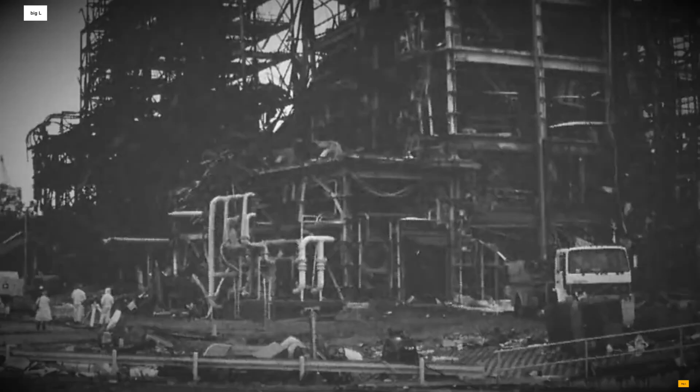A disaster would rack up a death toll of 23 employees, injuring 314, and the company in charge would get a modest $5 million fine, even though safety on the site was inadequately managed. As such, today's subject will get a rating of 7 on my plainly difficult disaster scale, and also a 7 on the historical legacy scale as the event helped improve process safety. Welcome to a brief history of the 1989 Phillips Petroleum Chemical Plant Explosion and Fire in Pasadena, Texas.

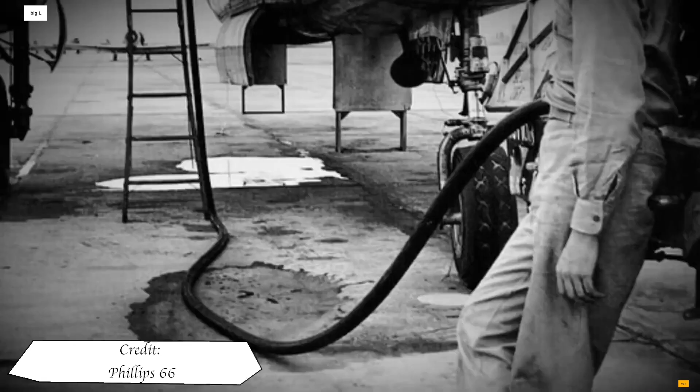Phillips Petroleum was a petrochemical company with its history tracing all the way back to 1917, with the forming of the company by brothers Lee Eldas Phillips and Frank Phillips, based out of Oklahoma. Quickly, the company worked in all parts of the oil industry, including fuel production, crude oil pipelines, refineries, and marketing of petroleum products. Like many companies during this period, the demand for fuel boosted the organisation's coffers. But the growth would really speed up during the big old dumpster fire that was the Second World War.

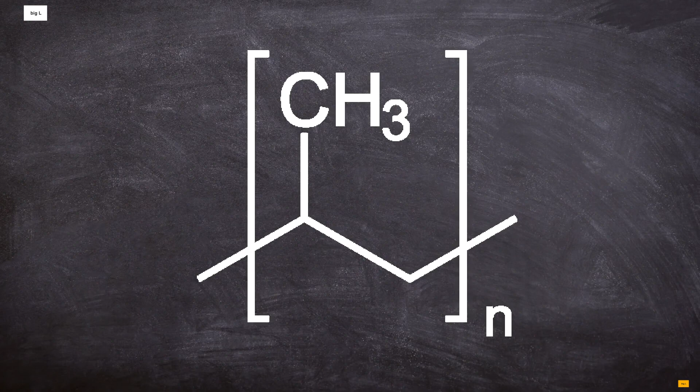By the late 1940s, the ever-growing Phillips Petroleum had become active in the chemicals business, creating Phillips Chemical Company, which set up and began operating a large plant on the Houston Ship Channel. In the 1950s, the plant began producing polypropylene plastic, trademarked as Marlex. This was used in blow-moulded and rotationally moulded components. This will be the facility that we will be focusing on today, and would be the epicenter for a disaster nearly 40 years after it began operation.

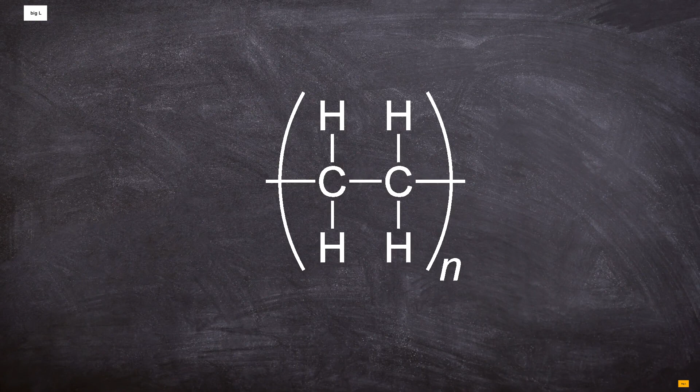By the 1980s, the site was being used to produce polyethylene, which is one of the most common plastics used in bags, food packaging, and pretty much anything you use day to day. Making this material can be a dangerous process as highly flammable gases are given off, which would be the cause for the disaster. But first, let's look at the process used by Phillips Chemical.

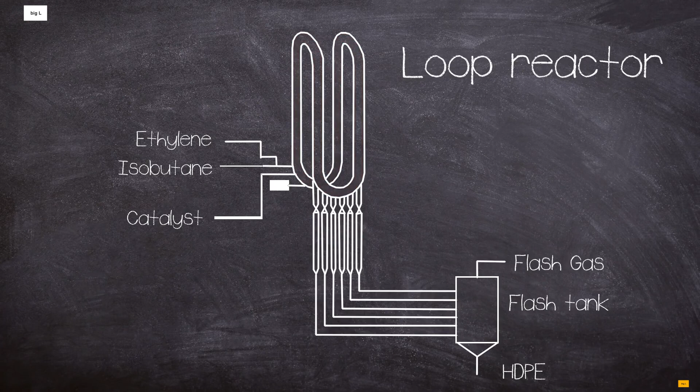High-density polyethylene is manufactured at plants 4 and 5 at the Houston Chemical Complex, at high temperatures and high pressures. The process uses a thing called a loop reactor, which is an arrangement of 30-inch diameter pipes mounted vertically in 150 feet tall continuous circular shaped structures. This heats and pressurizes the chemical mixture to 600 psi and to a temperature range of 82 to 110 degrees centigrade. Reaction is one of condensation polymerization of around 95% ethylene dissolved in isobutane. Hydrogen and hexene were also added to achieve targeted product quality specifications.

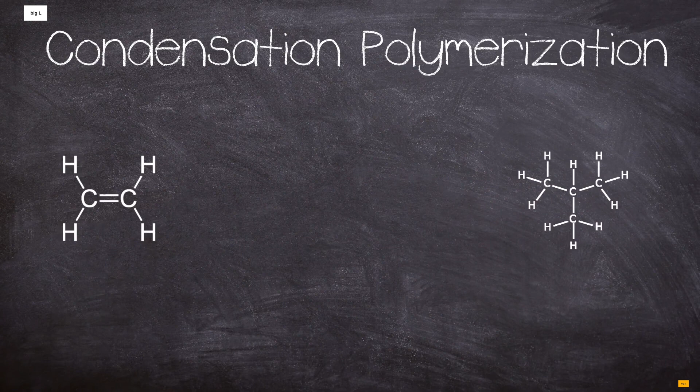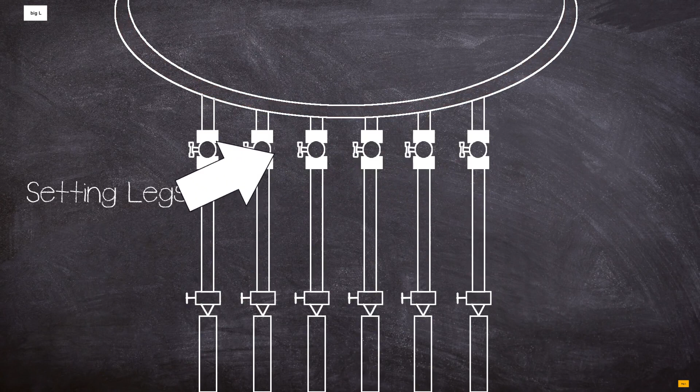As the reaction product gained mass in the loop reactor, it would eventually become heavy enough to drop out of the circulating reaction mixture. At the bottom of the loop reactor were settling legs, 6 in total and 8 feet long, that are used for collecting the polyethylene particles. Each leg had 2 valves, one at the top and one at the bottom. The upper consisted of an air-operated 8-inch ball. These were used to isolate the section from the reactor after production. The bottom valves were take-off ones that were fed into a flash tank.

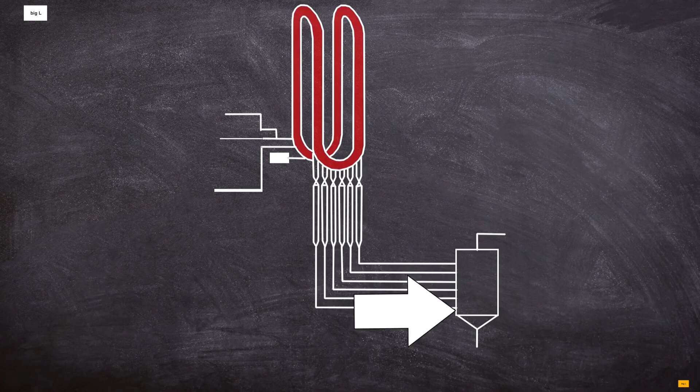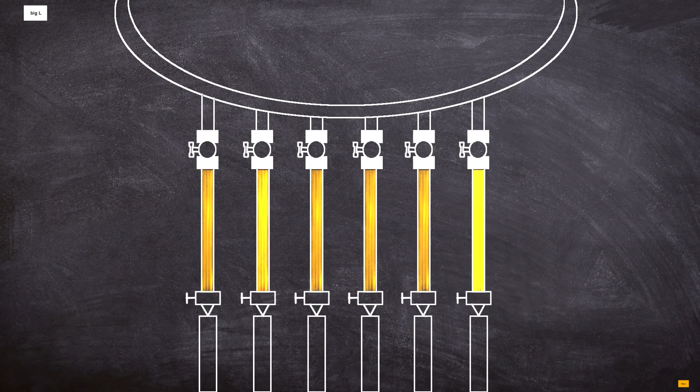Once a leg was full or clogged with product, the 8-inch ball valve would be closed. This was to stop the highly flammable gases inside the reactor from venting to atmosphere. The settling legs were the interface between the high-pressure reactor and low-pressure flash tank process sections. Once the process was complete, the polyethylene fluff was then taken from the tank to be turned into the finished product. But the way the reactor and settling legs were designed to work had a problem, and that was everything had to be shut down once all 6 became full or clogged. This necessitated the need to be able to empty the legs during full power production to reduce downtime.

Phillips Petroleum had a policy for safe equipment isolation, meaning any maintenance would have backup isolation called double blocking. This can be done by a double valve setup. Obviously, this would only work if the area you want to isolate had 2 valves. If this wasn't possible, then a bolted flange setup could be used to have 2 sets of protection.

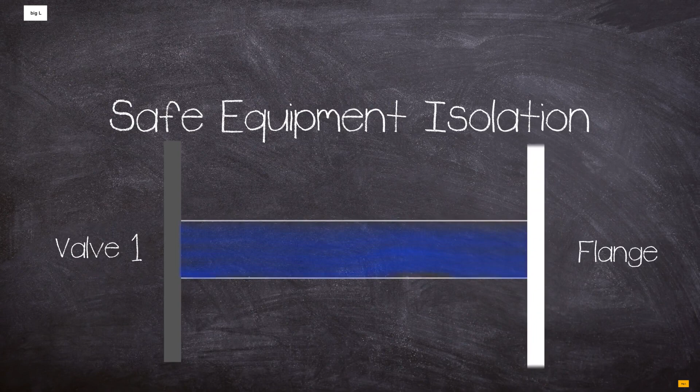This had, in the case of a loop reactor, a problem: installing the blind flange was time consuming, making maintenance whilst the reactor was running pointless. So, as we see very often in these videos, a local solution was devised.

This involved the 8-inch ball valve being closed to isolate the plugged settling leg from the loop reactor. Then the 8-inch ball valve stem was physically locked in its closed position. Finally, the inlet and outlet air hoses actuating the 8-inch ball valves were disconnected from the remote valve switch control panel. This was double locked but definitely not double blocked, as any failure of the ball valve could mean the reactor

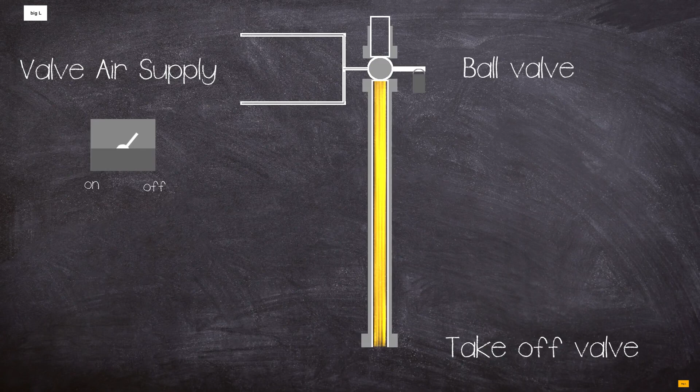was exposed. After this locking was complete, the settling leg could be emptied by removing the take off valve and having a contractor reach their arm up into the leg to pull out the fluff. This leads us to the 22nd of October 1989. 3 of the 6 settling legs in reactor 6 in plant 5 were plugged.

As had been done before during production, operations personnel isolated the settling legs according to the alternative isolation procedure, closing the 8-inch ball valve, locking them and disconnecting the air hoses. The first was disassembled and had its fluff removed relatively easily by the contractor. This happened whilst the reactor was still in operation.

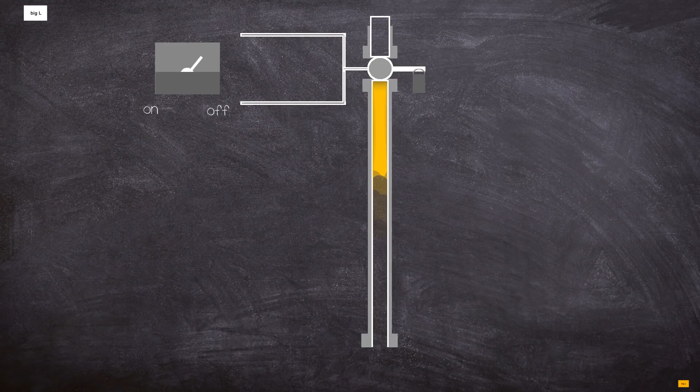The crew wouldn't tackle the second leg until the next day, when the contractor attempted to remove the blocked fluff. Only 3/4 was set free, leaving the leg partially blocked. The morning hadn't gone to plan, but the contractor attempted to get out the remaining material around lunchtime. At some point, the air hoses to the valve had been reconnected and the lockout device was not properly installed.

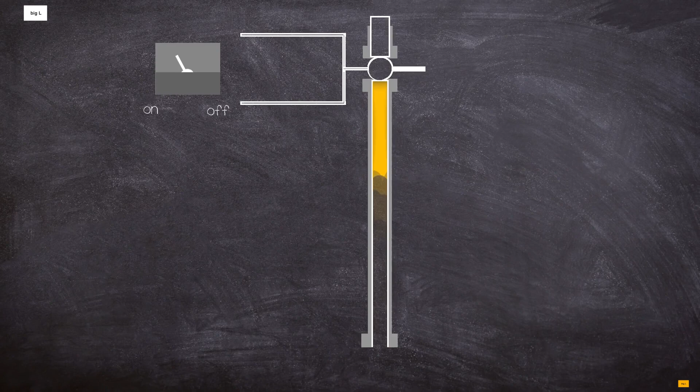Somehow, the valve opened, releasing the highly flammable gases out of the reactor into the air. At around 1 p.m., the reactor lost its entire contents of around 85,000 pounds of the heavily flammable process materials, after which the escaping chemicals then ignited.

The explosion created a force equivalent to 2.4 tons of TNT, registering as a 3.5 magnitude earthquake on the Richter scale. Several other explosions were felt as chemicals stored on site also ignited. 23 people were killed and 314 were injured. The fire raged at the 14-storey high site.

First response was provided by Phillips Petroleum Company's contractor fire brigade, which was soon joined by members of the Channel Industries Mutual Aid Association. Cooling water from the fire apparatus was trained on the area of the fires, but the intensity and the fuel load was such that the responders were only able to contain the fire. The efforts were also hindered by low water pressure caused by pipe rupturing during the explosion.

Eventually, control over the fire was achieved by approximately 1900 hours, although smaller blazes continued throughout the night. Rescue and recovery of the victims from the explosion was severely hindered during the fire and even afterwards due to fears of structural collapse. A 1-mile no-fly zone was set up around the site to prevent anything being disturbed by aircraft downwash. With a heavily damaged site reaching a cost reported to be over $700 million, a question is left.

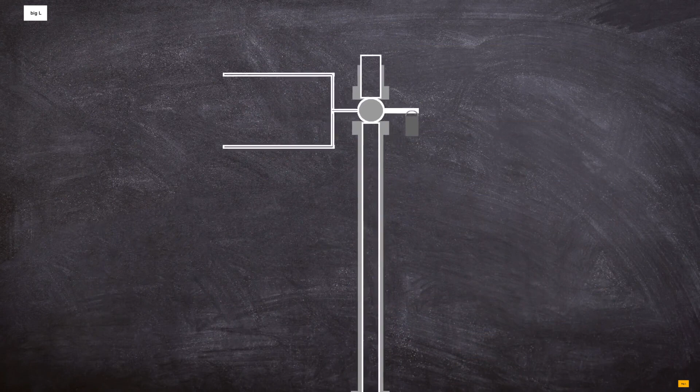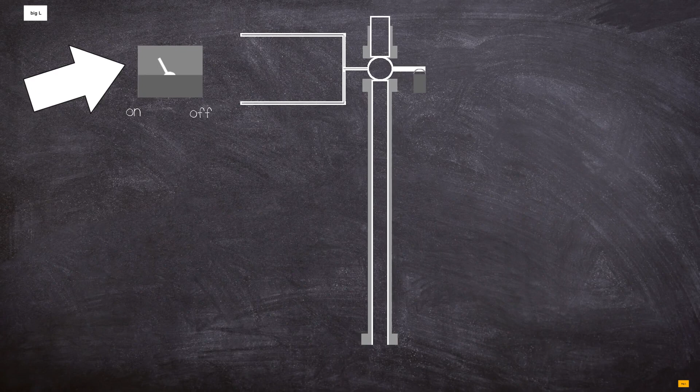How? Well, investigators quickly found that the valve had been improperly locked out, but a lot of guesswork is left as to why. This is because the operators working at the reactor were killed in the explosion. It shouldn't have really happened, as the process for locking the valve was very well known and established on site. Investigators also discovered that the valve was capable of being locked closed as well as, worryingly, open, which could have led to confusion, and coupled with the operators not removing the airlines, could have been the root cause.

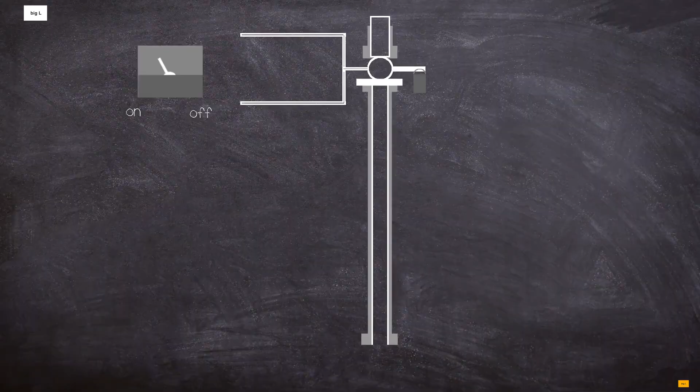Regardless, the procedure should never have been allowed to happen without a blind flange, which would have been a form of double protection. And this was reflected in the investigation into the disaster, which found that Phillips Petroleum had a lack of process hazard analysis, employing inadequate standard operating procedures. The legs came into question for not having a fail-safe block valve and an inadequate lockout tag procedure in the form of a double-locked but not double-blocked procedure.

Furthermore, there was an on-site lack of a combustible gas detection and alarm system, which didn't give workers warning of an impending incident. Also, it was found that the fire wasn't helped by the presence of ignition sources and inadequate ventilation systems for nearby buildings. Phillips was fined $4 million for the infractions that led to the explosion, as well as improving working practices across the company and its sister enterprises. The ramifications from the event would spread widely across the whole industry, helping improve safety, although things are never as safe as they should be.